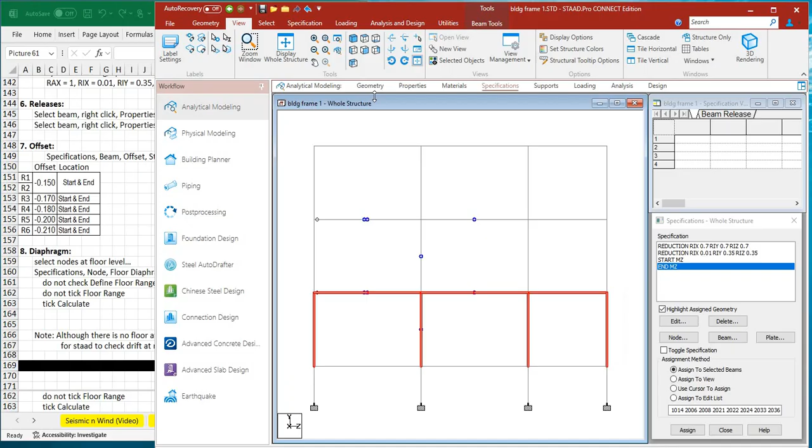So, start MZ. So, okay siya. Tsaka yung end MZ. So, natapos na tayo dito sa step 6. Ngayon, mag-o-offset na tayo.

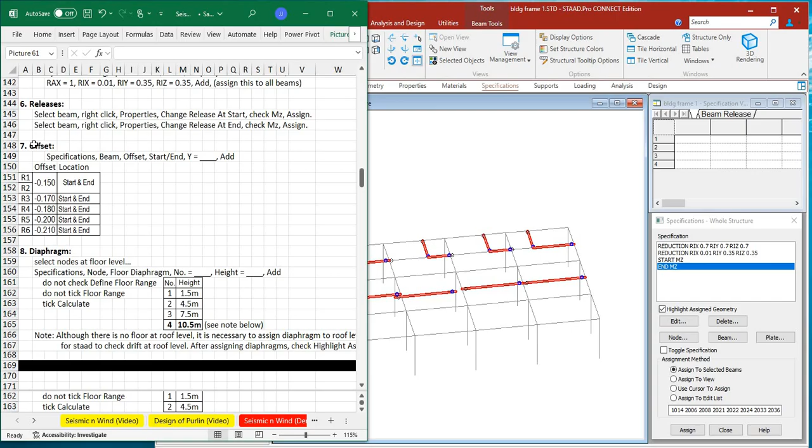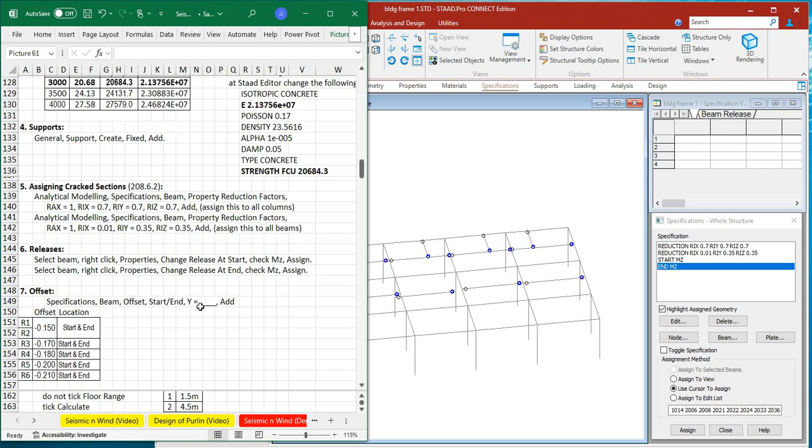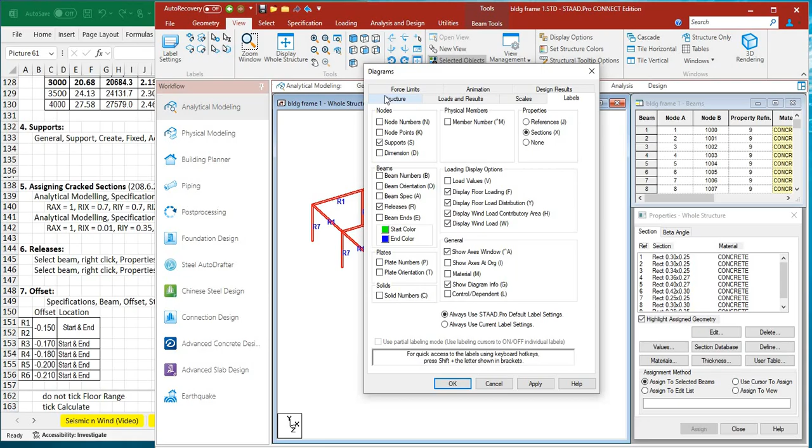Ang purpose ng offset is, for example, yung roof beam, sa taas. So, check natin si roof beam tsaka si third floor columns. And then, label settings natin, section outline. Yan.

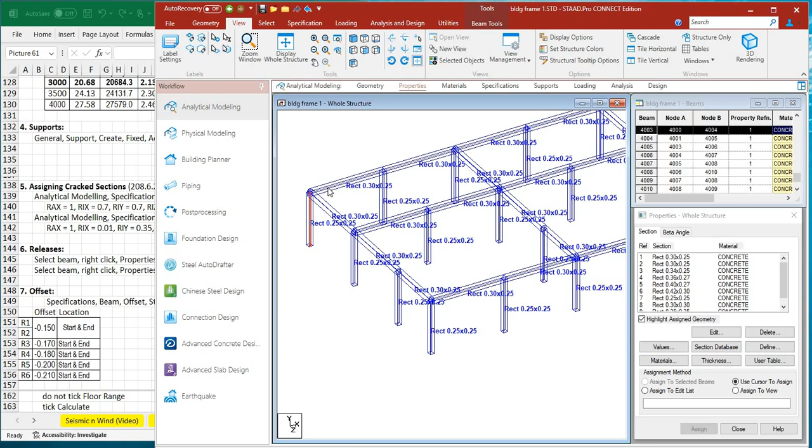Okay. So, ang idea natin dito, yung top of beam, i-align natin siya sa top of column. Okay, so if you will look here, tsaka ito, yan lang. Ito. So, itong top ng beam, i-align natin siya sa top of column. Ngayon, ang height nitong beam na yan is 0.3. So, ibababa natin to ng 0.15.

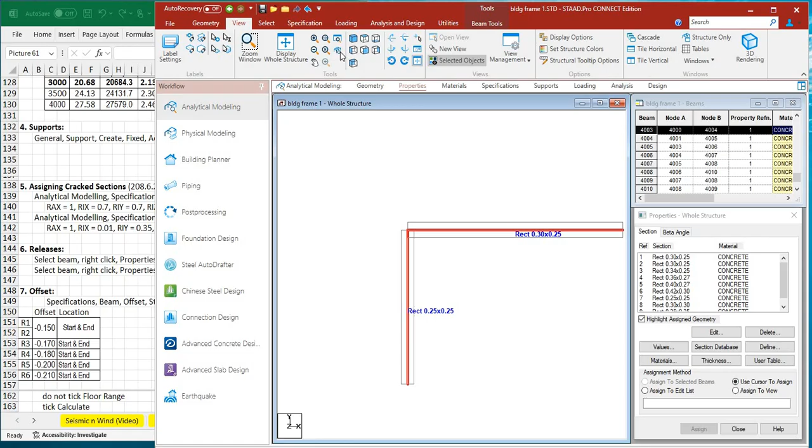Okay, so in short, lahat ng roof beam, since 0.3 ang height, i-offset natin siya pababa ng 0.15, which is like this. So, display whole structure, and then click ko si R1. Ayan. So, lahat ng roof beam, tamang-tama, 0.3 ang height. So, ulitin ko lang, no?

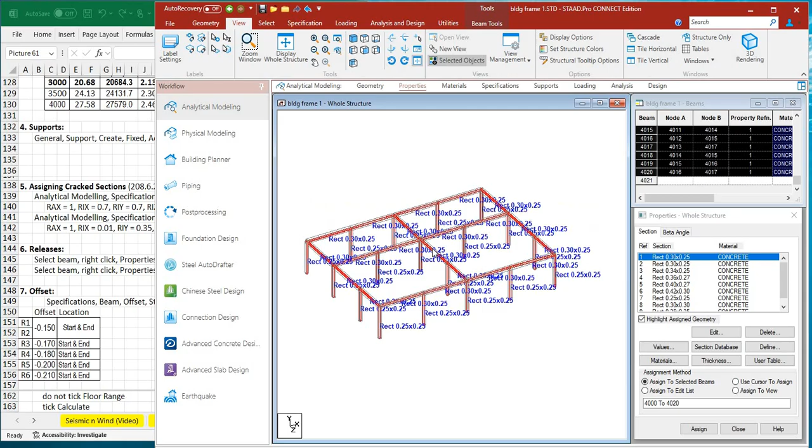Ayan. So, i-select ko si roof beam. Tapos, specifications. And then, go to beam. Tapos, sa may offset. And then, Y. So, yung center line, yung center niya, ibababa natin ng negative 0.15 at i-assign natin siya sa start. And then, you click assign. Yan. So, mapapansin nyo, lahat ng start node bumaba. Okay, so ganun din yung kabilang node or which is the end node.

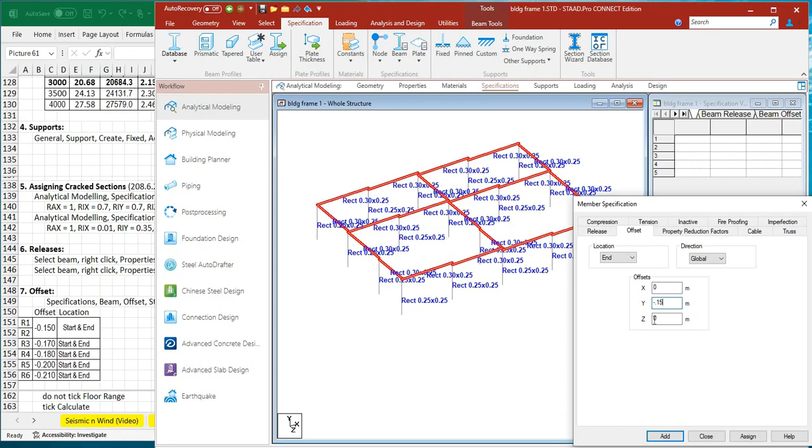So, click mo ulit si beam. So, take note ha. Let's say, naka-unselect tayo. So, balik tayo sa properties. Click mo si R1. Yan. Then, go back to specifications and then beam. Tapos, offset. This time, you click end and then Y, negative 0.15 and then assign. Yan. Now, let's look at this beam and column. So, if you will look closely, mapapansin nyo na bumaba siya ng 0.15.

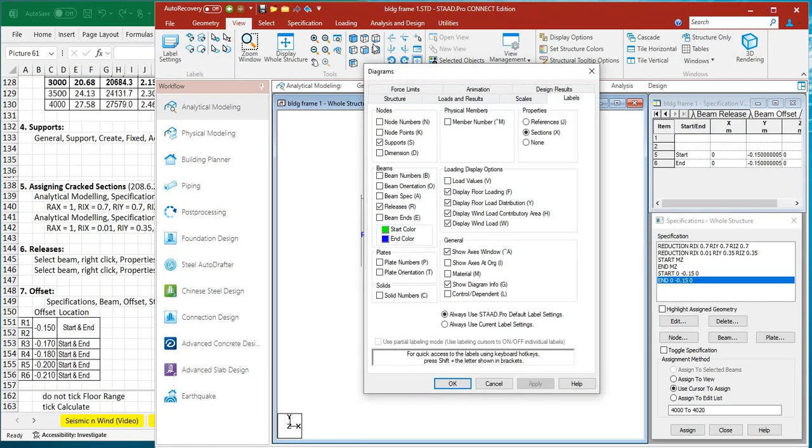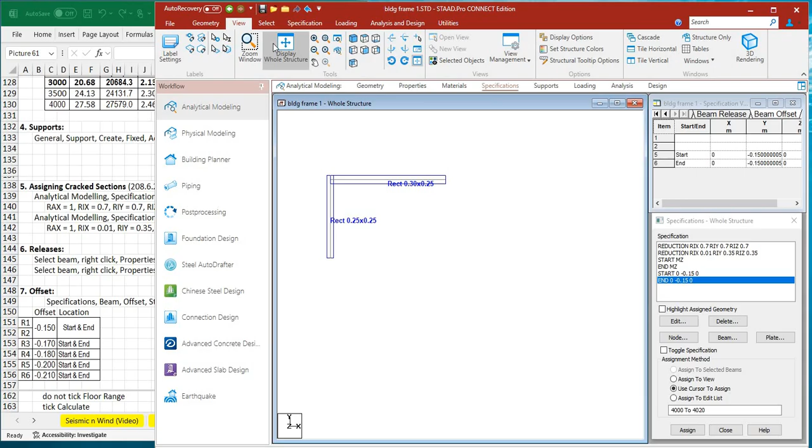Ngayon, lagyan natin ng outline. So, mapapansin nyo na yung top ng column coincides with the top of beam. So, we will do the same thing with the third floor beam tsaka sa second floor beam. Okay, so let's display whole structure. And then, i-select natin ngayon si third floor beams, tsaka second floor column. Then, selected objects only.

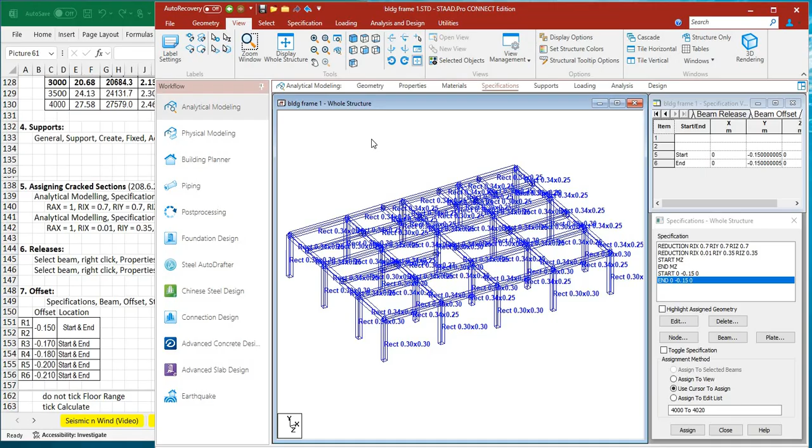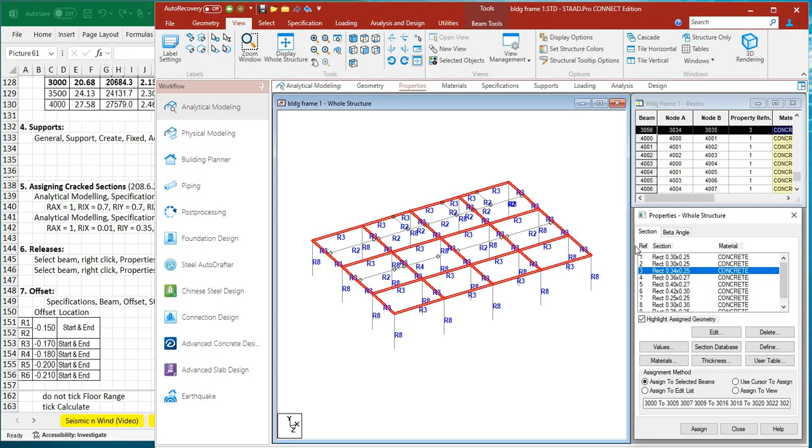Tapos, check natin ngayon sa properties. Patayin muna natin yung mga, ayan. Gagawin kong none para mawawala yan. So, punta tayo ngayon kay R2. So, yan ang R2 and then ito naman ang R3. So, ang meron na beams dito sa third floor, you have R2, R3, and no more. So, ang R2 natin, the height there is 0.3. Siyempre, i-offset natin ito ng negative 0.15. Tapos, itong R3 naman, i-offset natin siya ng negative 0.17.

Okay, so dito tayo ngayon kay 0.3. So, balik tayo kay specifications and then beam and then offset Y, negative 0.15. So, nakastart siya and then assign. And then, beam ulit. Tapos, offset this time end and negative 0.15 and then assign. Next, balik tayo sa properties. Punta tayo ngayon kay R3. So, 0.34 lahat yan.

Punta tayo kay specifications and then beam, offset, start, negative 0.17. Ngayon, yung 0.17 na yan, that is 0.34 divided by 2. Tapos, offset again, this time end, and then negative 0.17, and then assign. Okay. Meron pa tayong nakalimutan. Ito kayang landing beam. Kailangan pa ba natin siyang i-offset? Hindi na. Okay? So, punta ako ngayon sa second floor naman.

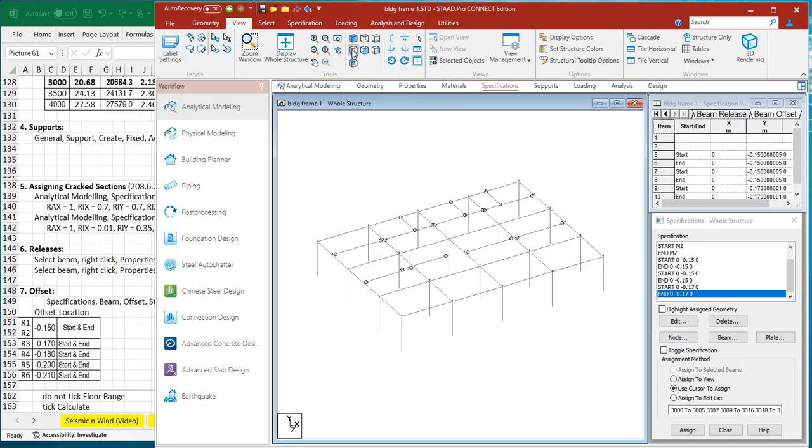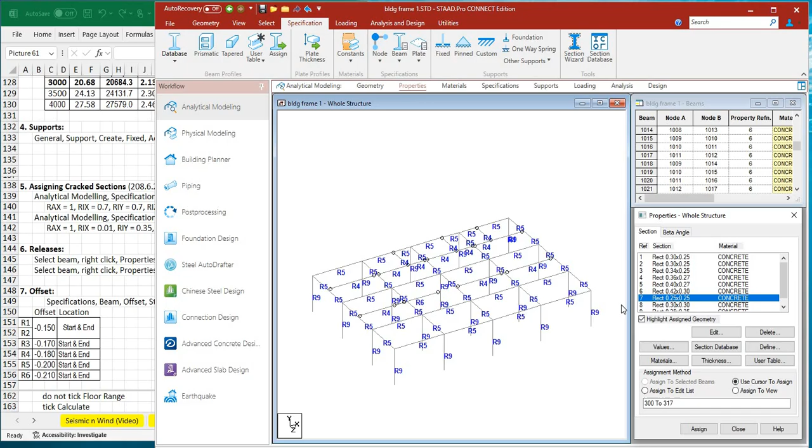So, display whole structure sa second floor. And then, selected objects only. Back to properties. So, i-click ko lang simula dyan sa R1, R2, R3, 4. Yan. So, ito ngayon, ang meron dito sa second floor, you have R4, tsaka R5, and R6. So, R4, tsaka R5 lang ang ating i-offset. So, yung R4, yung mga stringer beams na yan, i-offset natin siya ng negative 0.18.

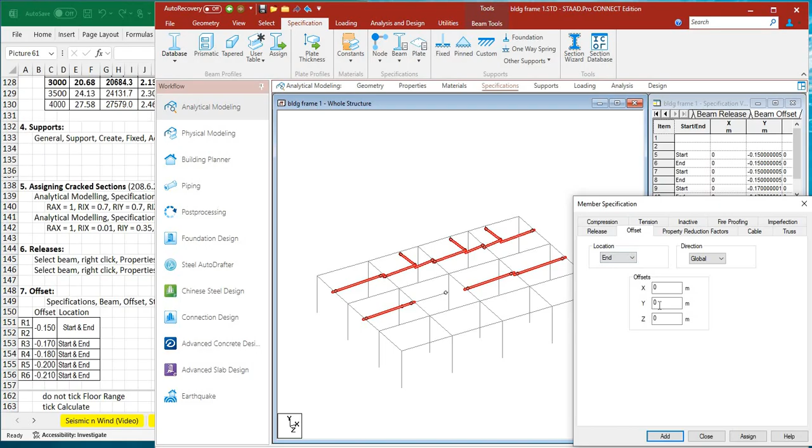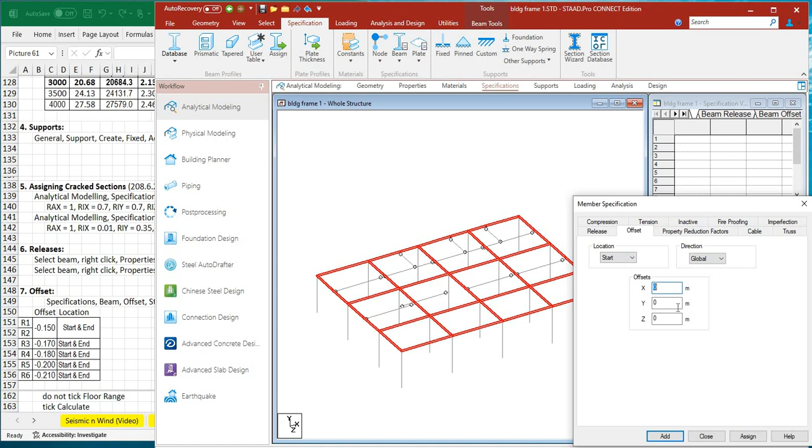Okay, so specifications, beam offset negative 0.18 assign, then beam offset, and then end negative 0.18, and then assign. Tapos, click natin ngayon si R5. Yan. So, this time, ang offset nitong R5 is 0.2. So, specifications, and then beam, and then offset, negative 0.2, assign. After that, beam ulit. This time, you click offset, pero end, and then ang Y is negative 0.2, and then assign.

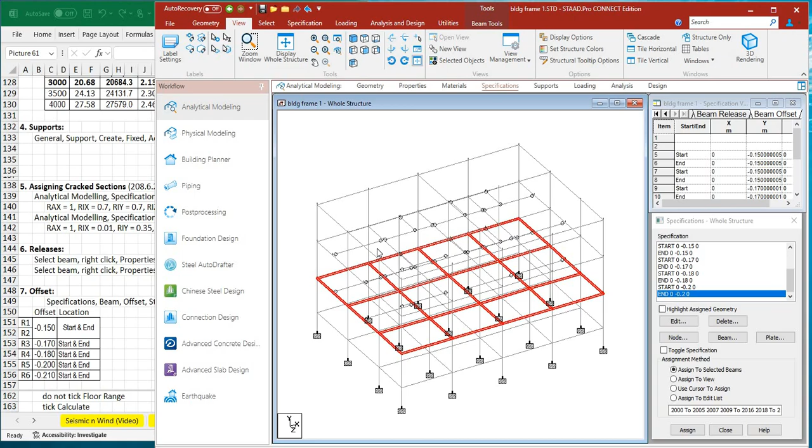Okay, meron pa ba tayong i-offset? Itong first floor. Okay.

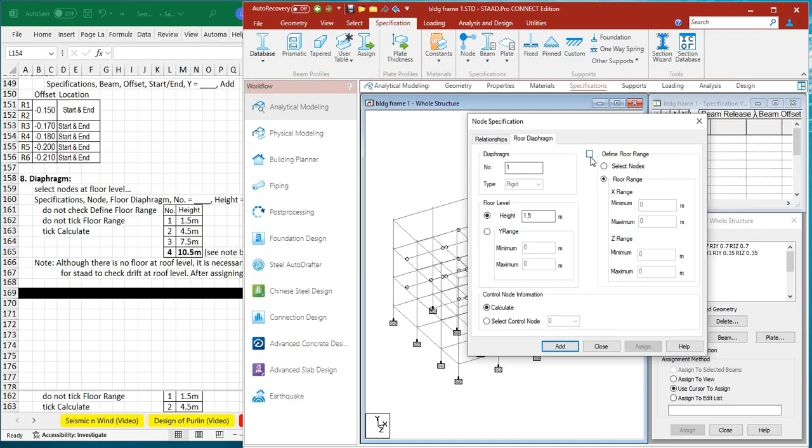And then, make sure na do not check define floor range. Ayan, blanco mo lang yan. And then, do not tick floor range. Ayan, importante wag mong checkin yan. Tapos, make sure na nakaselect yung calculate. Then, you click add. Tapos, make sure na nakacheck ito. Yan, highlight assigned geometry.

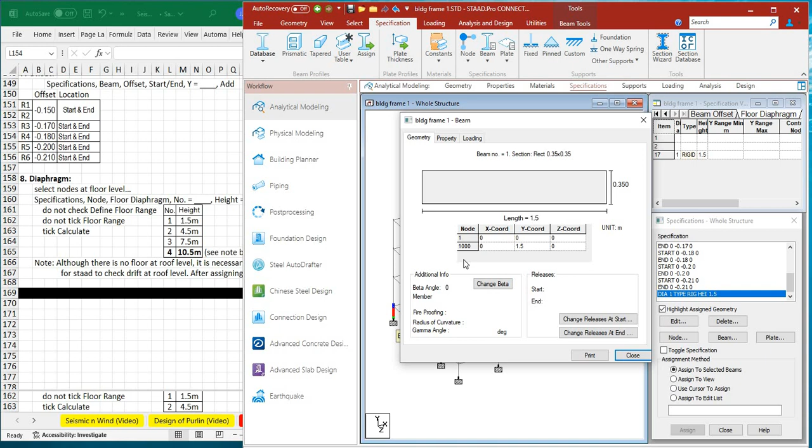Okay, next. So, ang ating rigid height, first diaphragm is 1.5 meters from the ground. Next naman, ang height niya is ito. So, that is 3 plus 1.5, magiging 4.5 meters ang diaphragm natin for level 2. So, node again. Floor diaphragm. Ngayon, number 2. Then, your height is 4.5. Then, you just click add.

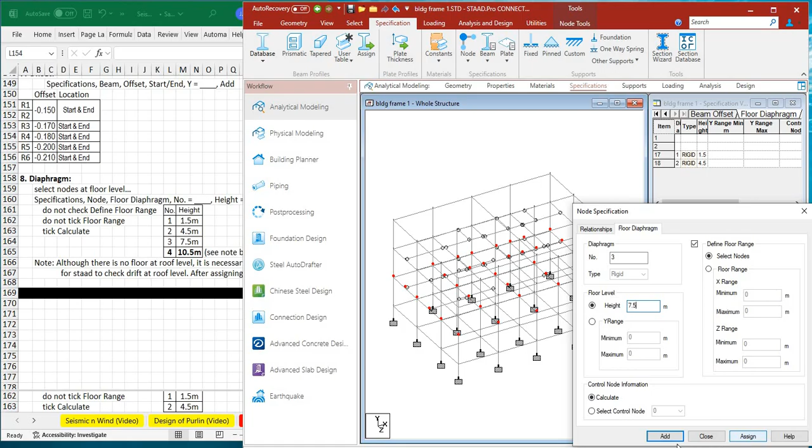Tapos, node again. Floor diaphragm. And then, 7.5. Then, add. You don't need to click assign. You just click add. Ngayon, yung 7.5 na yan, oops.

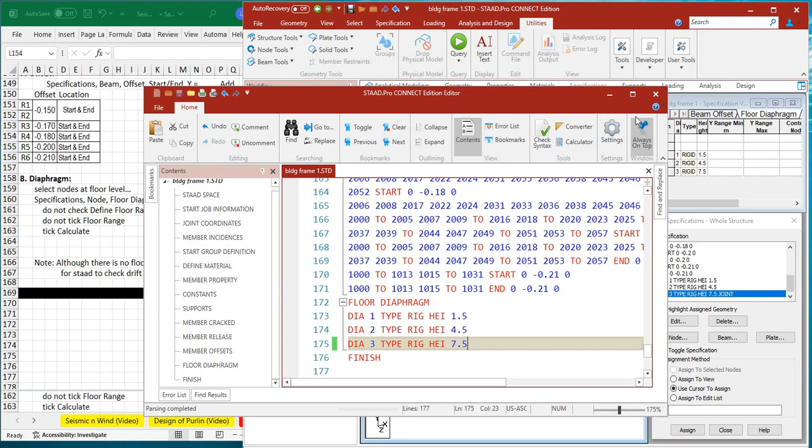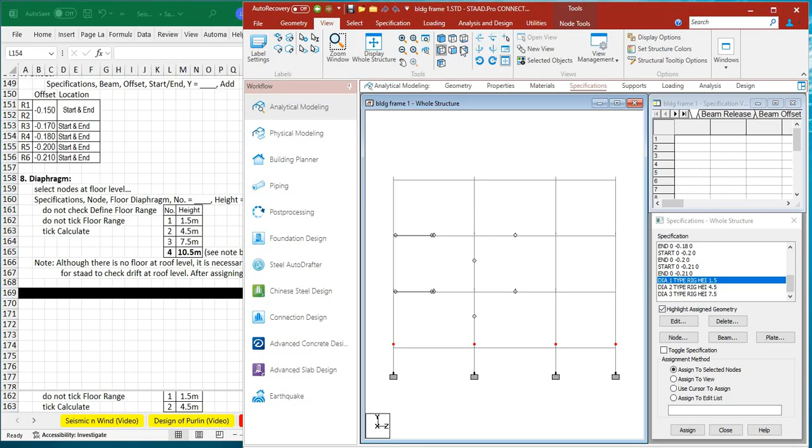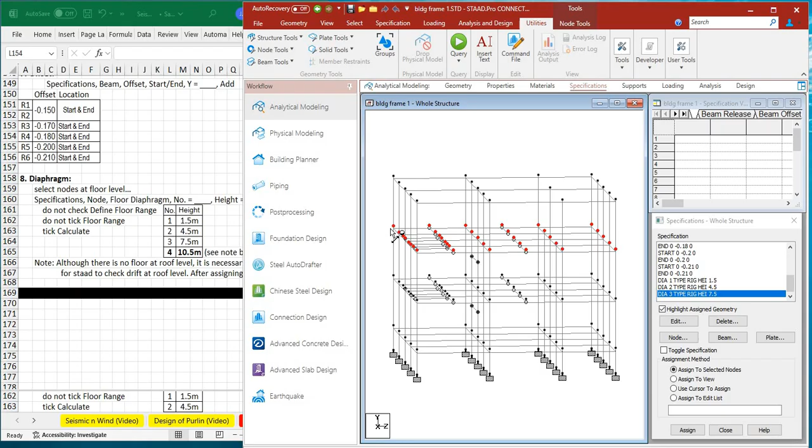Tapos, balik tayo kay specifications. Ayan. Diaphragm. Check natin yan. So, diaphragm 1, front view. So, diaphragm 1, diaphragm 2, and then diaphragm 3. Okay, so the height there is 7.5. If you want to verify, punta tayo dito kay utilities. So, node tools, node to node distance from base up to this node ay 7.5.

Okay, so note, although there is no floor at roof level dito sa taas, it is necessary to assign diaphragm to roof level for STAAD to check drift at roof level. After assigning diaphragms, check, highlight assigned geometry. Okay, so mag-assign din tayo dito sa roof level.